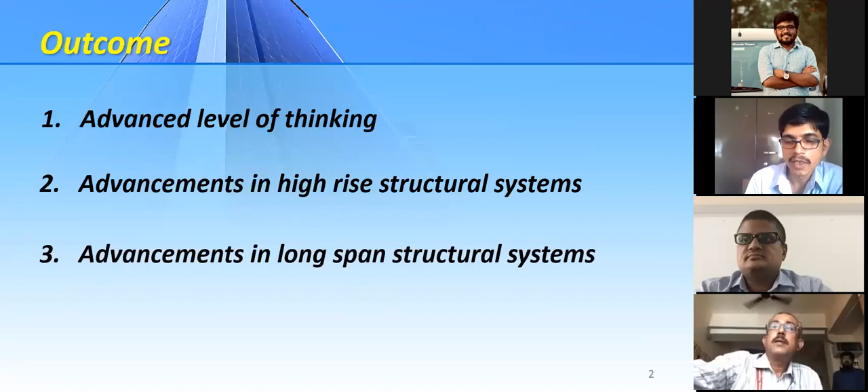So before we move on to the actual types of structural systems and their advancements, let us try to understand in a simple way what a structural system is. In the simplest way, we can define a structural system as one which transfers the loads through interconnected elements or members, right?

In your UG or PG studies, what you have done so far is analyze the individual structural element. But now, if you think of a structural system as a whole, you should be able to assess the interaction between those structural elements and how exactly they transfer the loads ultimately to the foundation without exceeding the stresses, under the various criteria that you already know, the deflection criteria or the stress criteria. So safely it has to transfer all the forces to the ground without exceeding the allowable stresses in the

members. For example, take this example. You can see this is a bridge. It may be a beam type or an arch type, or it may be a suspension or cable-stayed bridge, or a cantilever or truss type. Whatever the complexity of the structural system, ultimately its objective is to transfer the forces to the ground without exceeding the allowable stresses in all the members you are seeing now.

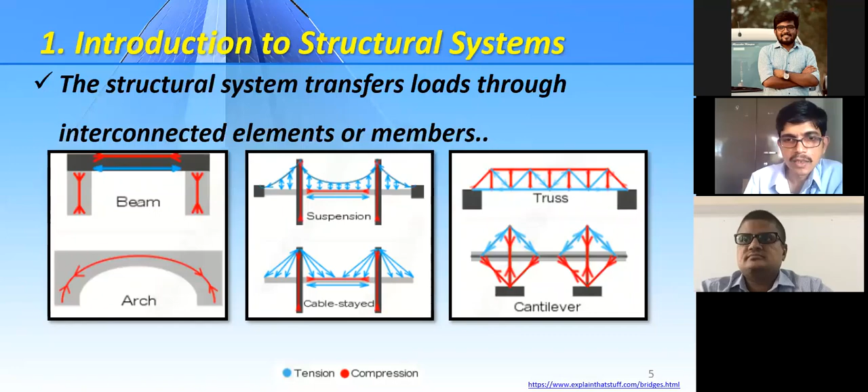In this picture, the blue marks indicate tension and the red marks indicate compression. We will see this in detail in the next one. It is not only in the case of bridges. If you take a simple frame structure, which you already know, it consists of a slab, and you can see this is the peripheral beam, and this is the column.

The main objective is that the entire load has to be distributed ultimately to the foundation. So as a whole, the structural system is a system in which there is an assemblage of all the structural members, and the entire thing behaves as a whole. And what is the objective? It has to transfer all the forces to the ground without exceeding the allowable stresses. That is what a structural system means.

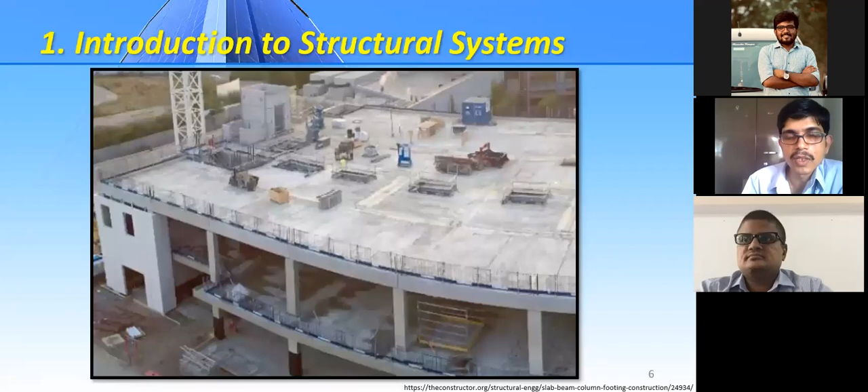So once we know what a structural system is, we should be able to understand the broad categories of structural systems. I'm going to introduce how you choose a structural system. For example, you want to build something. There are various requirements and various approaches to select a particular structural system. So what is the first approach?

The first and basic approach is the functional requirements. Then the structural material, the types of loads to be resisted and the load resisting mechanism. And one more: what type of forces your member is going to carry, in what way it is going to transfer the loads. That's what we are going to see. Taking the first one, we can categorize the structural system based on the functional requirement.

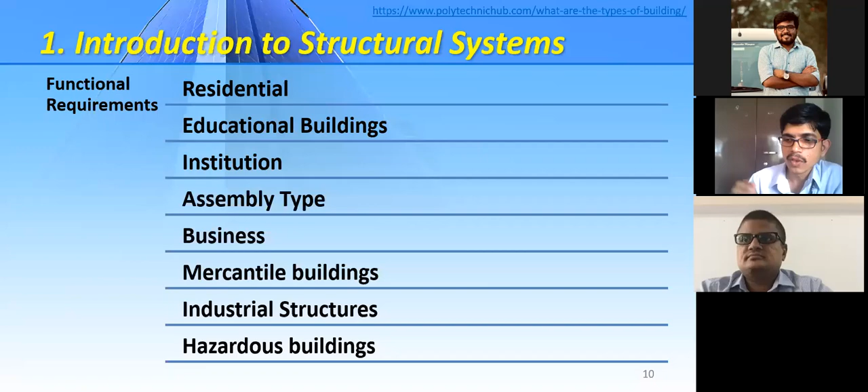Whether it is a residential building, an educational building, an institutional building, an assembly building or a business building, for any type of building you should first understand the functional requirement of that building. Because we can't adopt the same structural system for all these requirements, right? It's not possible. So first we should decide what type of structural system to implement for a particular function. That is one basic thing.

The next category you should decide is what type of material your structure is made of, because material is most important. To transfer all these stresses and forces, the strength of material is the most important criterion. The next thing is what type of structural system or material you are going to use in your structural system.

So what about the third one? The third one is what types of loads are to be resisted. This is most important, because if you take a normal residential building and you want to take only gravity load, your design will be different. But if you want to take lateral loads, earthquake loads, then the design is going to vary. So the third criterion is you should be able to decide the various forces acting on your structure. One is gravity, which is nothing but the dead loads.

Second one is whether you are going to consider lateral loads like earthquake and wind. Third one is dynamic, moving loads and vibrations. They are most important in case of bridges and machine foundations. And fourth one is fire. This is most critical. In case of public buildings, commercial complexes, shopping malls, some important buildings, fire is one of the most important criteria; you should be able to design your structure subjected to fire.

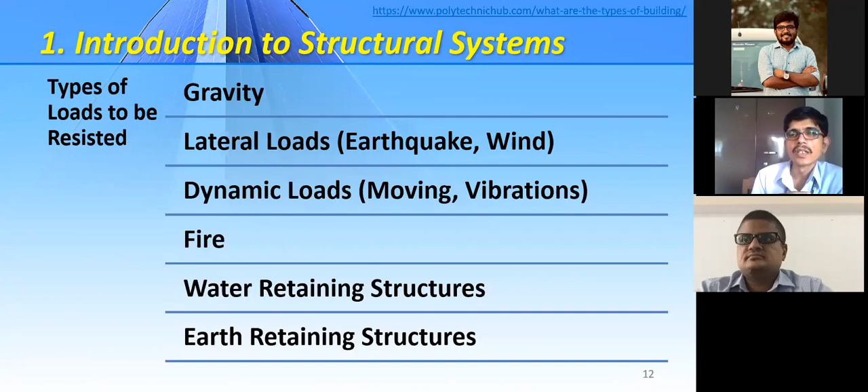Or whether that structure is a water retaining structure, or an earth retaining structure. So you should be able to assess the various forces acting on the structure. That is one. So what about the fourth one? The fourth one is load resisting mechanism. We are moving on to a very specific thing. Once you know the external loads, you should think of how exactly your structural system has to resist those external loads.

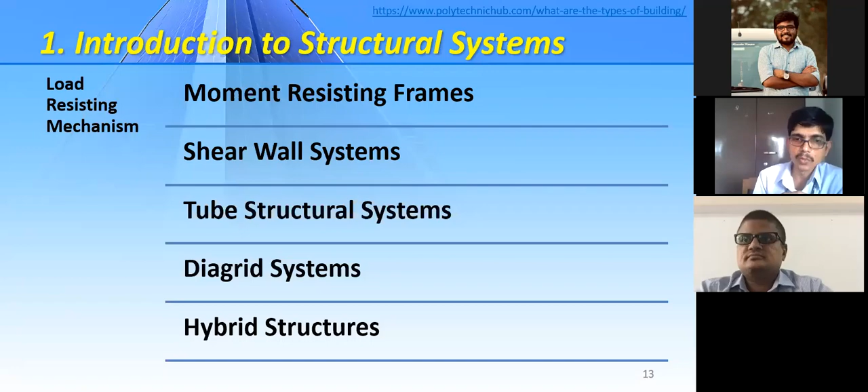Whether you can build a moment resisting frame, or adopt a shear wall system. If it is a very high rise, you should go to a tubular structural system. And based on the architectural view, if you want a diagrid structural system, you can adopt it. And some advanced structural systems like hybrid structure, which is a combination of, let us say, all the above. So that is one.

And last but not least is the type of primary stresses your individual structural member is subjected to. That is most important, because the most important aspect of categorizing the structural system is the type of primary stress that may arise in the members of the structure under the design load. For example, in your designs you have taken dead loads and live loads and multiplied them by a factor of safety, let us say 1.5. So 1.5 times dead load plus live load is nothing but your design load.

When your structure is subjected to the design load, what forces are going to develop in that structural member? Almost all the forces, whether gravity load or lateral load, ultimately, as we discussed in the beginning, have to go to the foundation. So how is your load going to travel from your superstructure to substructure: by tensile forces, compressive forces, a combination, or in the form of shear and bending? When all these stresses combine, the complexity arises. So this is a small introduction to the structural system.

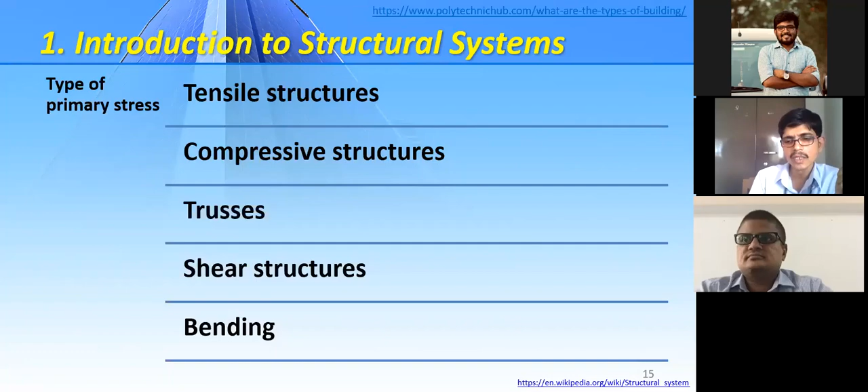Because in India, slowly we are moving on to the construction of high-rise structures. This is the present trend of developing advanced structural systems in order to build high-rise structures. If you take the past two decades, a lot of development is going on to achieve height and also span.

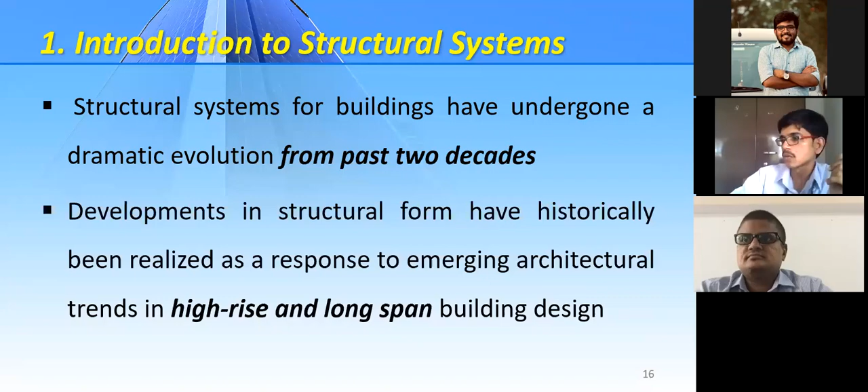So this is the second topic. I'm going to particularly choose the advancement of structures with respect to height. Before we move on to the latest or present trends of high-rise structures, let us pose one question to ourselves: are these tall buildings, or the achievement of height, a product of the modern industrialized world? Are we building high-rise structures only from the recent past, or from the past thousands of years? We should think about it.

Is it because of modernization or improvement of technology that we are able to achieve height? No, it is not so; look at some examples. These tall buildings are not the byproduct of modern civilization or modern industrialization, because it is an inherent human desire to build skyward, to go for tall structures.

The Mayan temples were built about 30 to 60 meters high. You know the Qutub Minar, around 73 meters. And everyone knows the Pyramid of Giza, about 139 meters high, built around 2580 BC, long back. So tall buildings are not a byproduct of the modern industrialized world, but in the past decades we are seeing so many developments due to technology. That's what we are going to understand today.

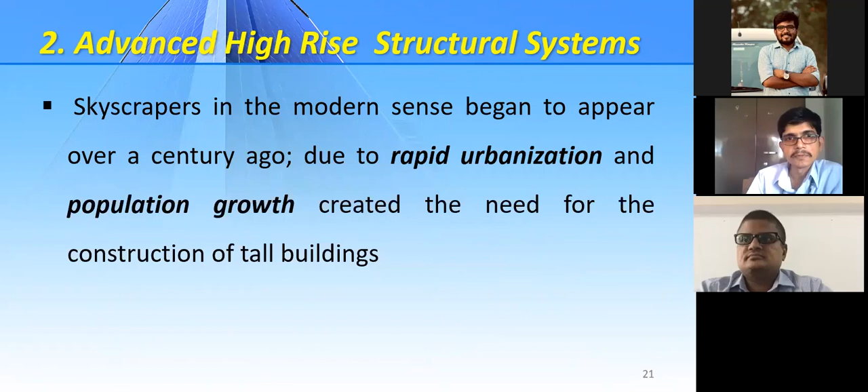As I told you, due to rapid urbanization and population growth, there is a requirement for tall buildings. Just for your information, I am sharing one of India's tallest buildings. Think of what type of structural system they would have adopted; you can explore later. The building is called The 42. It is a skyscraper in Kolkata, West Bengal, India. You can have a look at this.

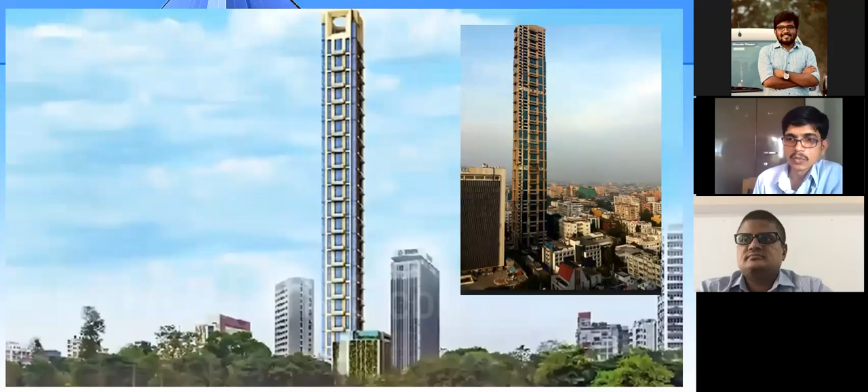This is a schematic picture, and this is the actual picture of The 42, India's tallest building. If you explore the tallest structures in India, one is in Kolkata, The 42, which is 268 meters high. Next is Mumbai, with many buildings. And in Bangalore, which is the tallest building? Have you ever thought of that? The tallest building in Bangalore is about 153 meters high.

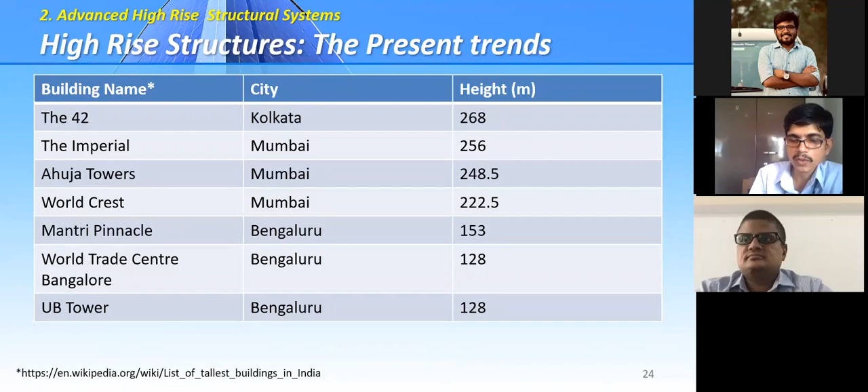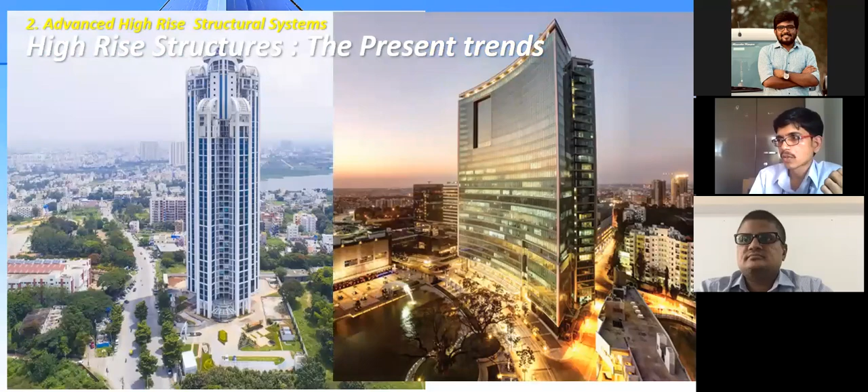Then the World Trade Center and UB Tower. This is Mantri Pinnacle, 153 meters high, the World Trade Center Bangalore, 128 meters, and UB City. The structural system for all these buildings is not the same. Why? Based on the functional requirement, the different load considerations, and also your money. If sufficient funds are available, you can adopt an advanced structural system, or it may be decided from an architectural point of view. There are many ways to decide the structural system.

Now we'll move on to the next one. Structural systems for tall structures can be categorized into two types: interior type and exterior type. What exactly does that mean? As we discussed in the beginning slides, it is whether your structural system is going to resist lateral forces or not, and if so, how it is going to resist them. Ultimately, all lateral forces have to go to the foundation. Then how will they go?

In the interior type, all the lateral forces on the structure are taken care of by structural elements located in the interior portion, at the center of your building plan. Those structures we call interior. If all the lateral forces are taken care of only by the periphery of your building, with all major structural elements at the periphery, then we call those structural systems the exterior type.

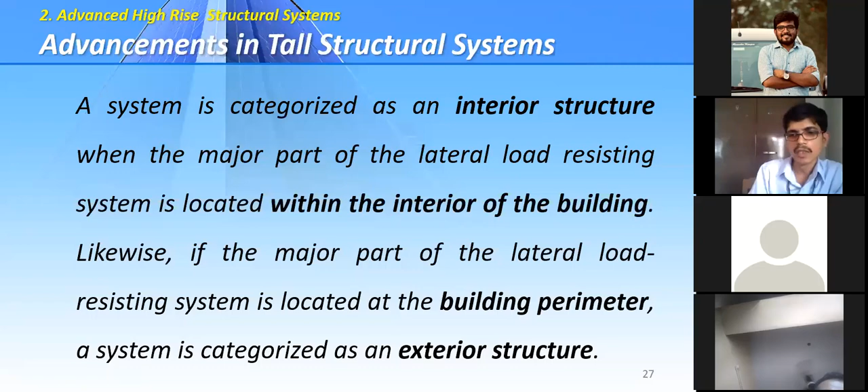Okay. So let us see this. There are so many things there; I'm not going in detail. I think the first one you already know. So what is this? This is a frame structure, right? So the first one you're seeing is a moment resisting frame. Everyone knows this. It is just a combination of beam, column, and slab.

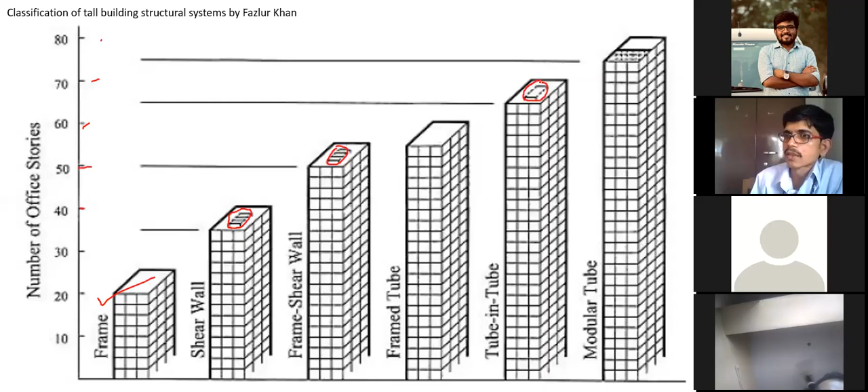But if you go higher and higher, like 40, 50, 60, 70, 80 stories, the structural system itself should be able to change. Once you observe this at the center, all these we will call the interior type. As I told, all the lateral forces will be taken care of by the structural elements located at the interior portion of the structure. Okay? And this is the exterior type.

I think many of you already know these terminologies like belt truss system, framed tube, truss tube. There are so many types of structural systems where the majority of your lateral loads will be taken care of by the peripheral columns and beams. Okay.

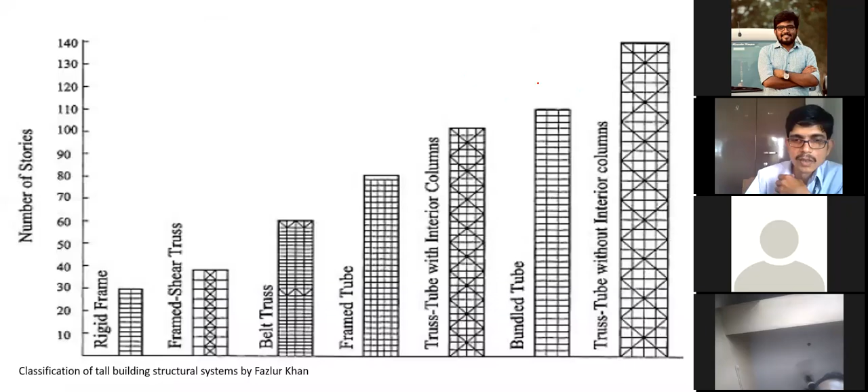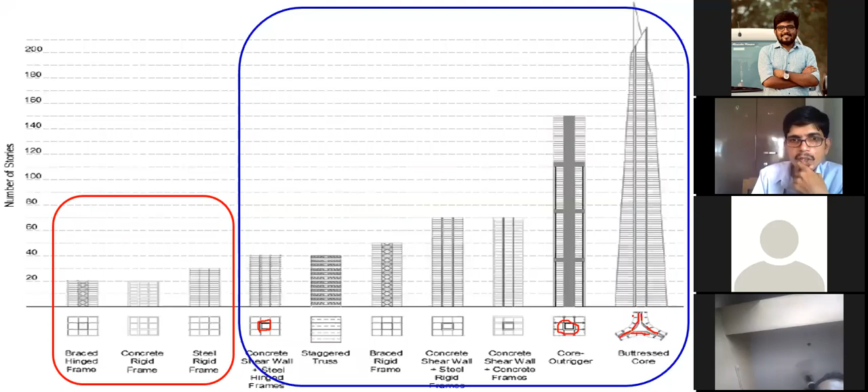So this concept is nothing but the shear wall system, where the entire lateral forces will be resisted by your shear wall. Okay, let us try to understand. The building you are seeing right now in front of you was built in 1903. It is not the first reinforced concrete; it is the first skyscraper in reinforced concrete, having only 16 stories.

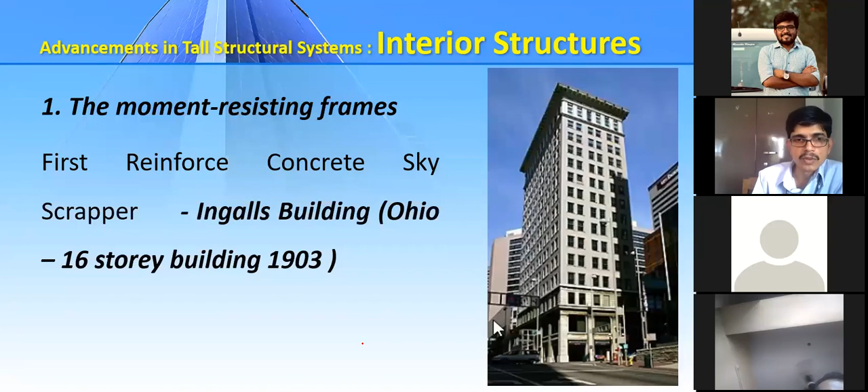You see the advancement. Now, what total number of stories can you expect? So 48. Now it is 800 or 900 meters high. You see the advancement of structural systems in the present scenario. Okay? That is one thing. And the next basic thing is the moment resisting frame.

So what is a moment resisting frame? A simple moment resisting frame consists of horizontal beams, or girders, and columns with a monolithic slab. So the next question is again the same: how will this moment resisting frame resist your loads, or how exactly is your load transferred to your foundation? In a moment resisting frame, the majority of the loads are transferred to the foundation through the resistance offered by flexural stiffness. The stiffness is the governing criteria, right?

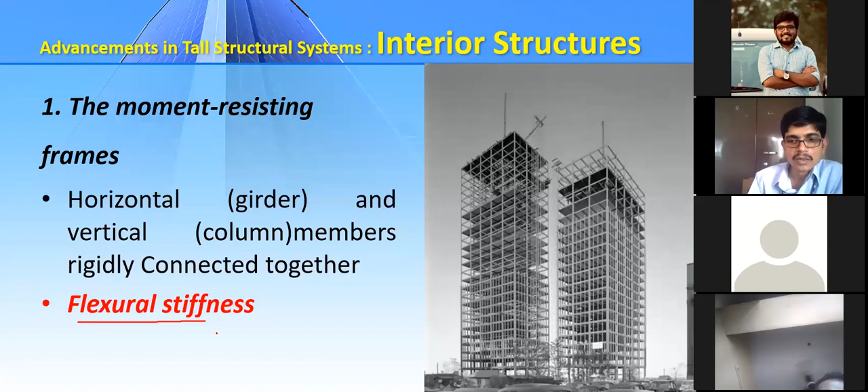Because when you designed the slab and beam, what was the governing criteria? You calculated the bending moment, no? The same way, if you take the structure as a whole, the flexural stiffness or bending action is mainly responsible for transferring all the loads to your substructure. Okay, so this is one more example, right?

So what is the second way? The second way all the loads are transferred to the substructure is through axial stiffness. I think you have designed columns, right? Everybody knows how to design a column. A column is strong in compression, right? But it will also take bending. But there are some special structural systems you can design in such a way that all the lateral forces are transferred only through axial stiffness. That we will see in the next slide.

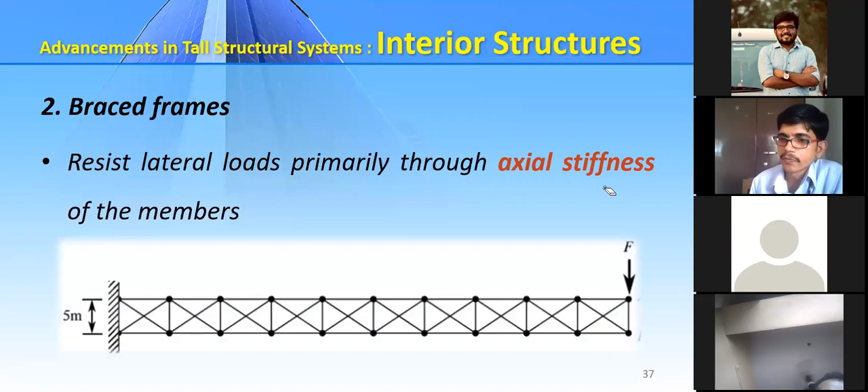So you see, just imagine all buildings. All buildings are nothing but a freestanding cantilever beam. Imagine all the buildings on the earth are nothing but a freestanding cantilever beam. If you take this F as a force, let us say a lateral load. Just take this F as a lateral load.

If you apply this, you just see, ultimately all the forces will go to the substructure by axial stiffness. That is the second way. So those we will call braced frames.

And further, if we move on to the next advancement in the structural system, it is nothing but the outrigger system. If you go taller and taller, we can't use the same structural system. For example, the basic structural system is the moment resisting frame. Can you use the same moment resisting frame if your building is 100 or 150 meters high? No, not possible.

You should be able to think in what way your entire structure will be stable, economical, and also aesthetically good. That is a challenge for structural design engineers. So if you go higher and higher, some additional structural systems we should implement into our building. Those are called outrigger systems. I think almost everyone knows the concept of the outrigger system.

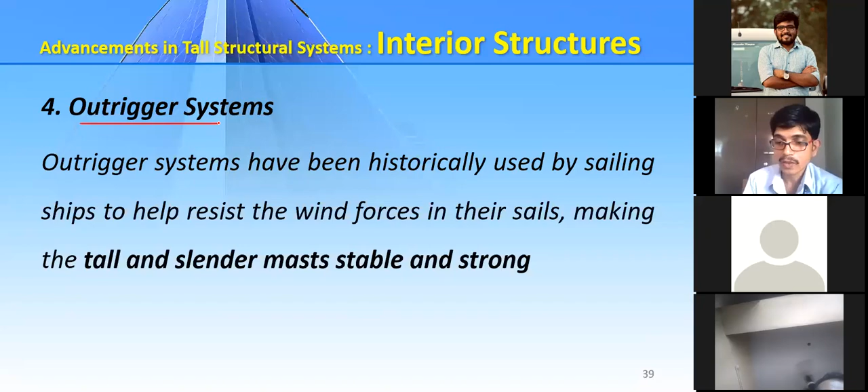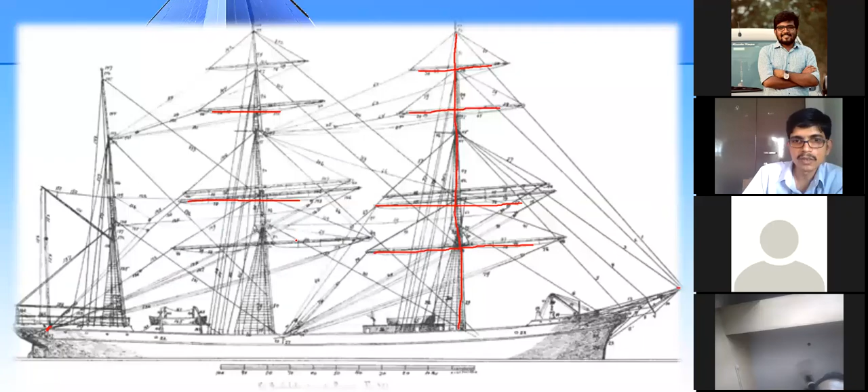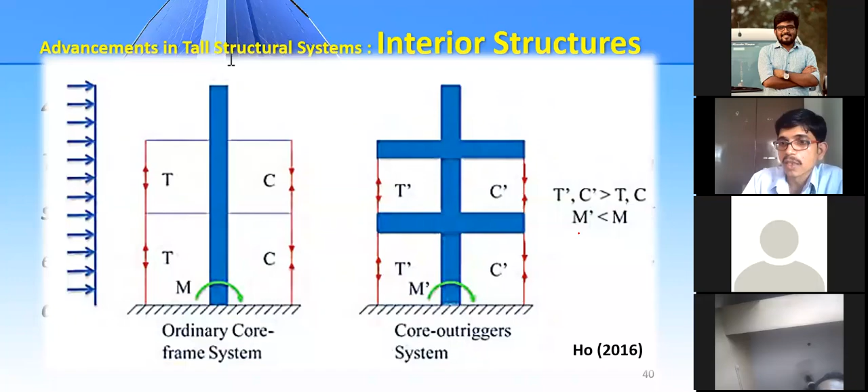But if your moment is more, it is very difficult to handle that moment with respect to design, detailing, and economy, if you give larger member sizes and more steel. But tension and compression you can easily handle, rather than this moment. That's the advantage of this structural system.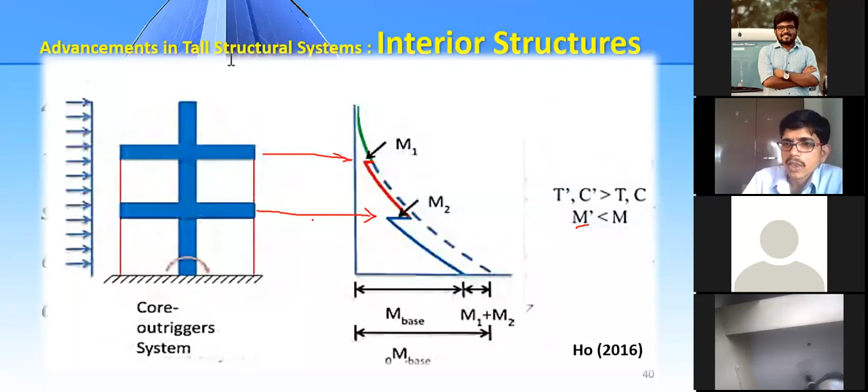So not only is the base moment going to reduce; wherever the outrigger is given, we can expect a reduction in the moment. You see, there is a reduction in the moment where you have given this outrigger. That is one. And this is one schematic representation.

This outrigger can be an RC outrigger or a steel outrigger. What you are seeing here, the red color portion, is this elevation. So this is what I was showing here. What we are discussing now is the interior type structure.

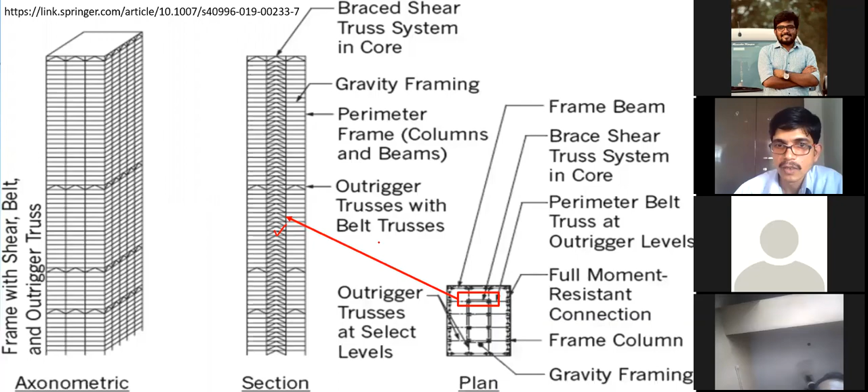So the second one, I'm just choosing the important points, not discussing everything. The second important structural component or subcomponent of any structure is the shear wall and frame interaction.

So just the same question: if you want to build a moment resisting frame for 50 floors using only columns, beams, and slab in one building, versus another building with columns, beams, slabs, and shear wall, which one is more effective?

If you don't provide the shear wall, what will happen? I think you know the design. Your compressive force, moments, everything will increase at the bottommost level, and you'd need to give very big size columns, 1 meter by 1 meter, maybe even 2 meter by 2 meter. Nobody will agree to that, right?

So in order to achieve economy of the entire structure, and to reduce the structural member sizes, you should use this shear wall in interaction with your normal moment resisting frame. This is one of the structural concepts you should understand.

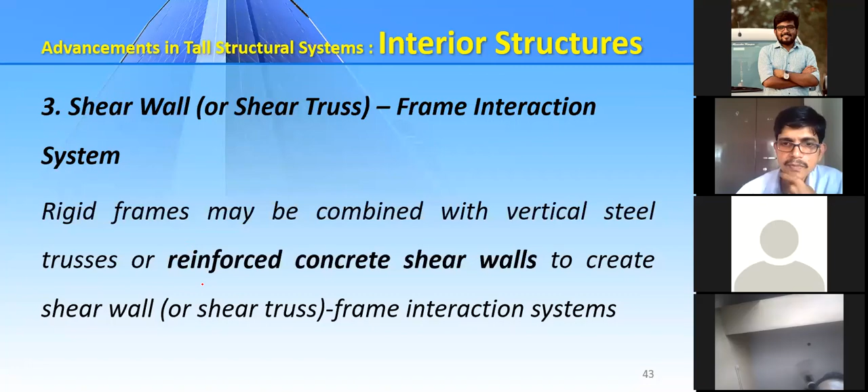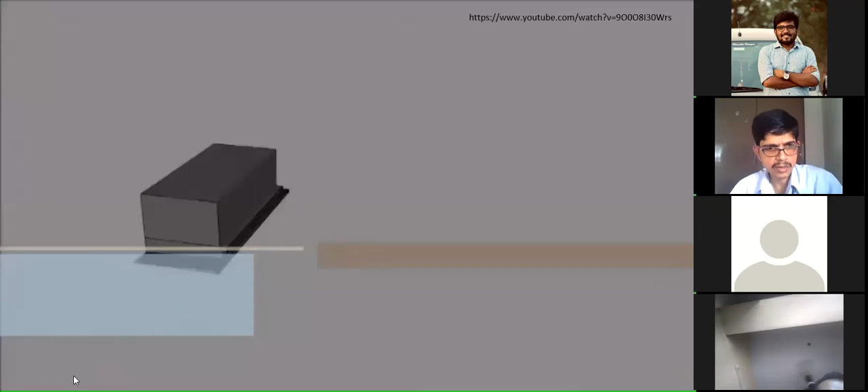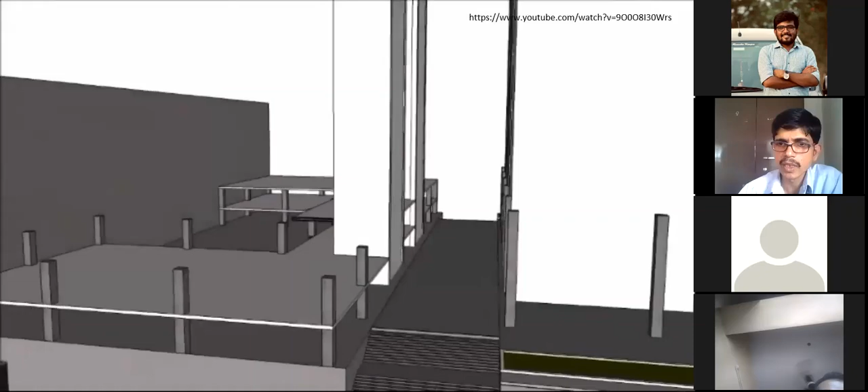I'll show a 2 minute video so you can understand the same building. What you are seeing in this animation is the same building or plan you saw. These are the core, or shear wall core, and these are the frames - columns and flat slab. There will be interaction between this core wall and your frame in order to resist the lateral force particularly.

So that is one thing. What you are seeing now here are the columns of a flat slab, and what you see like a box - those are nothing but concrete core wall.

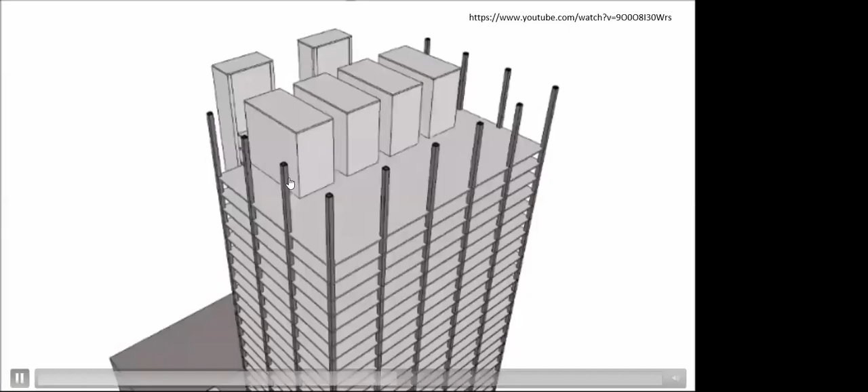So next, ultimately, after these - I shared starting from a moment resisting frame, then outrigger system, and the next one is this frame and shear wall interaction. And the latest, if you take this example, I think everyone knows this - the tallest reinforced concrete structure is the Burj Khalifa.

So everybody knows this, but what type of structure system is it? Can you guess what type of structure system? It is a reinforced concrete structure, but particularly what type of structure system has been adopted, because it is the world's tallest reinforced concrete building. You can't easily choose the type of structure system based on small criteria - you should be able to think of all the scenarios. So this is basically a reinforced concrete structure.

Okay, just see the video. A small video is there. After this video, you just answer yourself or think what type of structure system has been adopted.

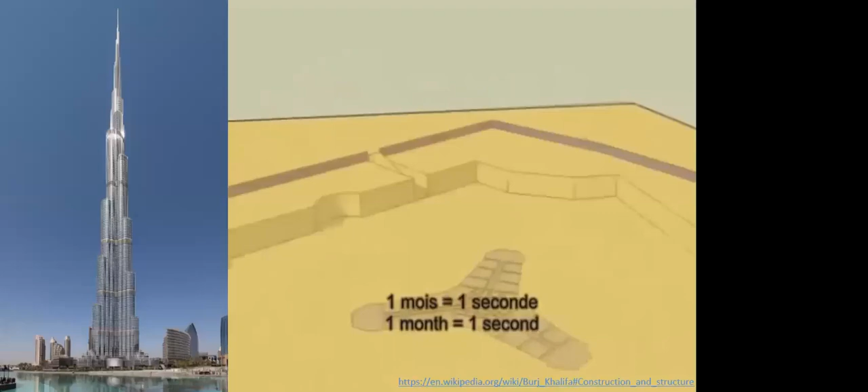As I told you, it is impossible to construct this world's tallest building, almost a kilometer high, by using this beam column system, moment resisting frame. It is impossible. Just think of what type of structure system may have been adopted - it will come right in front of your eyes. Just see what it is actually.

You can just think of it - it's basically reinforced concrete material. You see, they have chosen the material as reinforced concrete. Then they should choose what type of structure system to adopt.

So many concepts are involved here in the design - aerodynamic designs, dynamic analysis. So many things are involved in order to construct this building, the skyscraper, let us say.

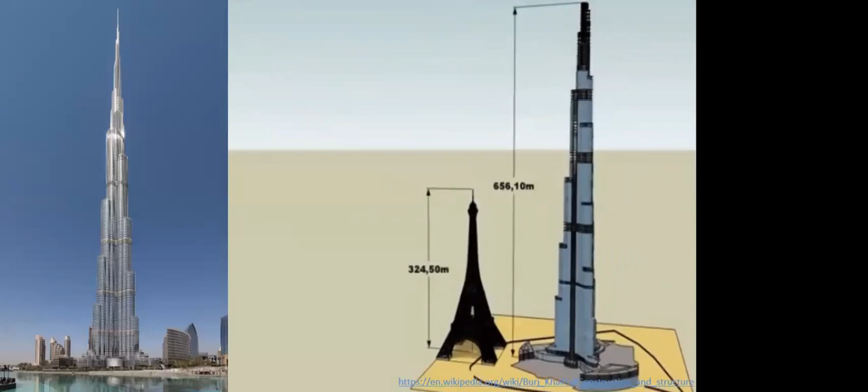Total 828 meters high it is. So just if you compare the height of this Eiffel Tower with this Burj Khalifa, you can appreciate what advancement has already happened in the real scenario, and what technology they are adopting in order to build these type of structure systems. It's almost double - exactly it is almost double the height of your Eiffel Tower, and it is reinforced concrete.

So that's the end of this session one. I've split this technical talk into two or three sessions - let us say introduction part, and this is the second part. So we have discussed starting from the Great Pyramid of Giza, which is built around 2000 BC, and we have seen what is the advancement that has happened in order to build the world's tallest reinforced concrete structure.

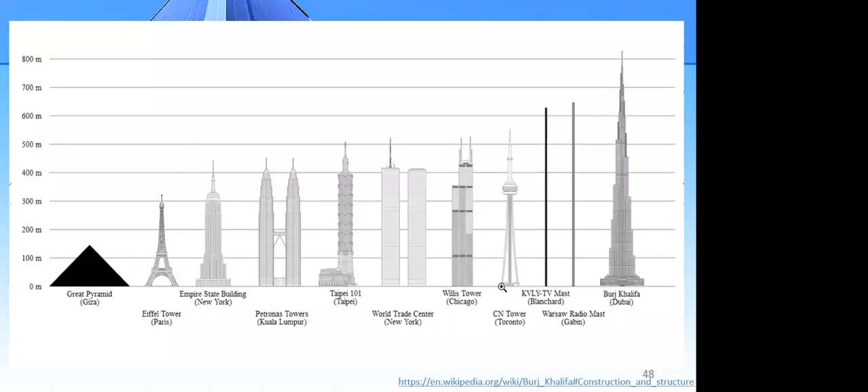So what type of structure system it is? If you think of that video again, the structure system they adopted is nothing but the shear wall. What exactly you saw, that is just core wall - it is nothing but a core wall. So those core walls are nothing but the shear wall. And external steel - they are going to cover it with external steel.

So the next advancement in the high-rise structure system is the diagonal structure system. This time still in session 2, still in high-rise structures.

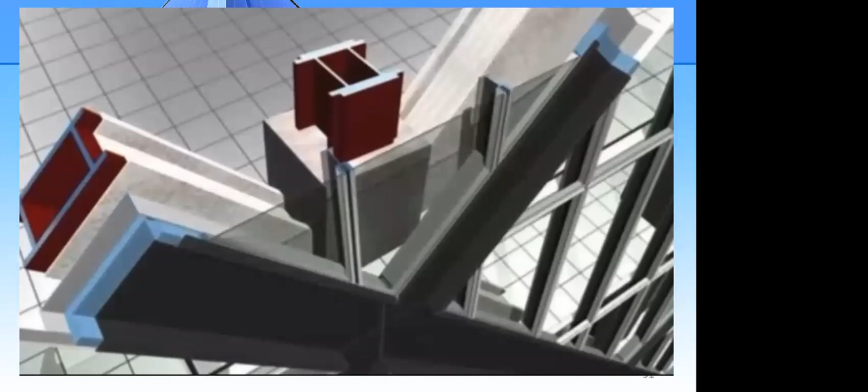Just observe - so this is why I've chosen this diagonal structure system. We have discussed the lateral load transfer mechanism is through axial stiffness. First one is through flexural stiffness, and the second one is through axial stiffness. The best example is the diagonal structural system.

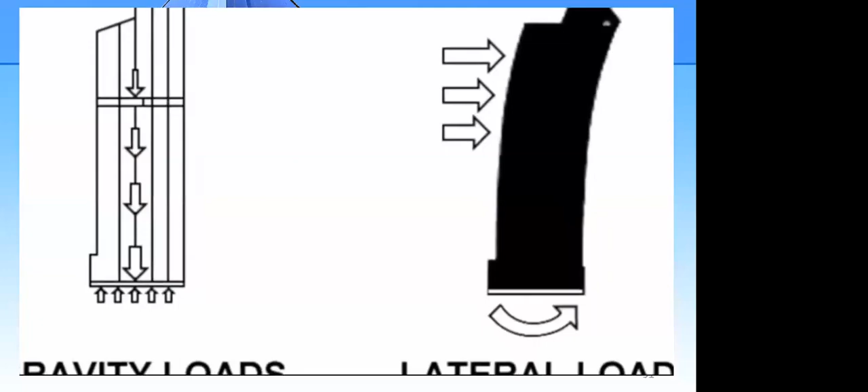Just observe - we can't use any other structural system in order to achieve the architecture behind this. We can span for greater length, eliminate large columns. Can anybody see or seeing the columns here? No. We can achieve large spaces without any column.

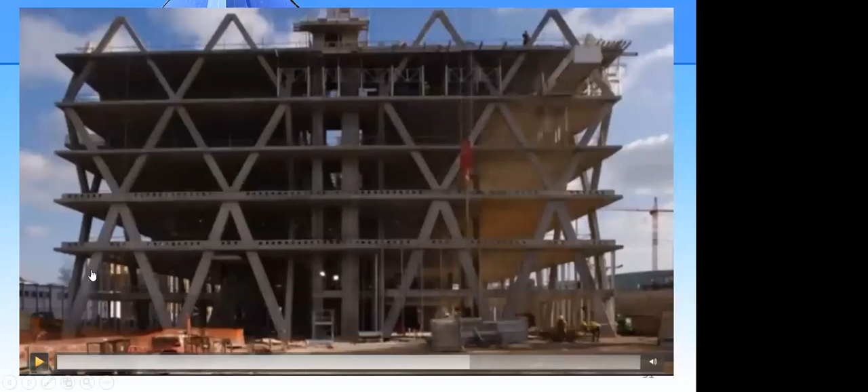I've stopped this video to just observe what difference they are observing. You already know so many buildings where beams and columns are there - there's a moment resisting frame. But what is the difference between the moment resisting frame and this diagonal system? The major difference is the moment resisting frame transfers your lateral force particularly in the form of flexural stiffness - bending of slabs, bending of beams, and development of moments in the column, which we already discussed. But here, if you see, there are no columns which are vertical. What you are seeing here, those columns are - what exactly I'm pointing out - these columns are inclined. That is the main difference between a normal frame structure and this diagonal structure.

Those columns are steel, okay, so these are inclined in nature. So whatever forces come on this, it's going to transfer through axial stiffness - like tension or compression. So we can achieve the architectural view also. You see all peripheral structure, the framework, having inclined columns. We can save the money also.

And also one most important concept you should understand here - if you adopt this structural system, in future, it may be like any blast load, or any impact, or collision of any aircraft. In some way, if any damage happens, we can expect only localized failure - we can't expect complete collapse of the structure. That is one of the most important criteria in this diagonal structure. You can avoid the progressive collapse due to external explosion. So that is one thing.

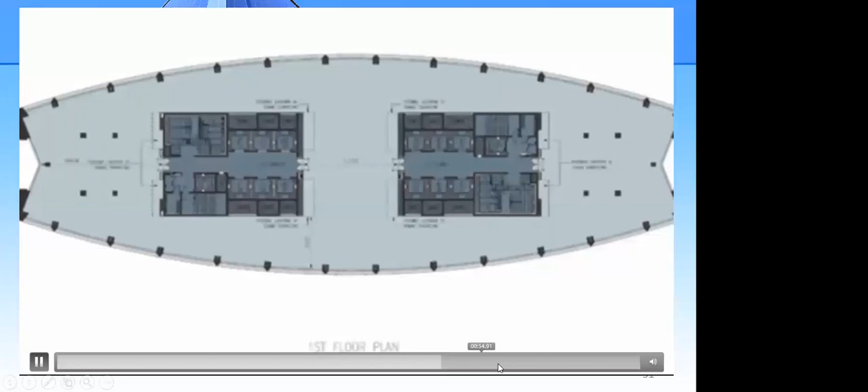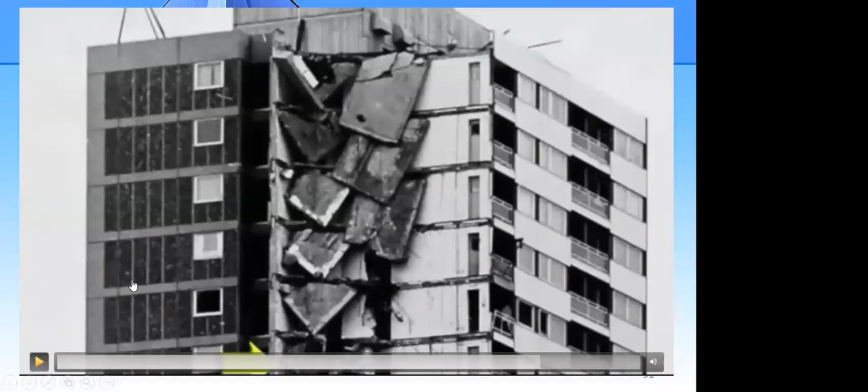So this will come under the category of exterior structure, because all your forces will be taken care of - in case of a normal frame structure, we can expect progressive collapse. But if you adopt this particular type of diagonal structure system, the effect of damage is localized here, so we can prevent the collapse of the entire structure.

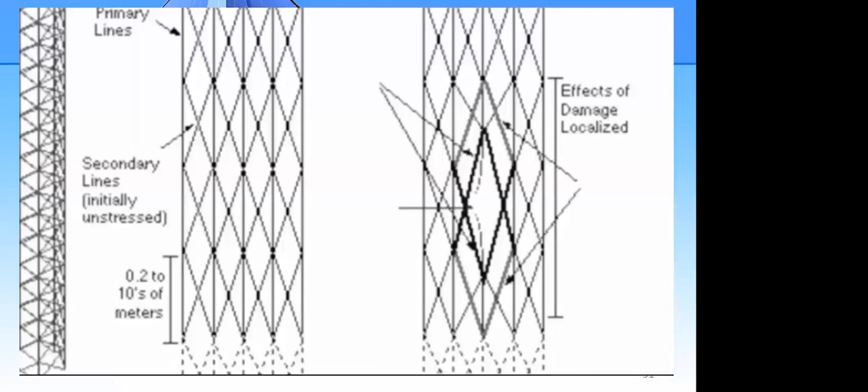So that is one. So we'll just take some case study. One case study I want to share is iLabs building in Hyderabad.

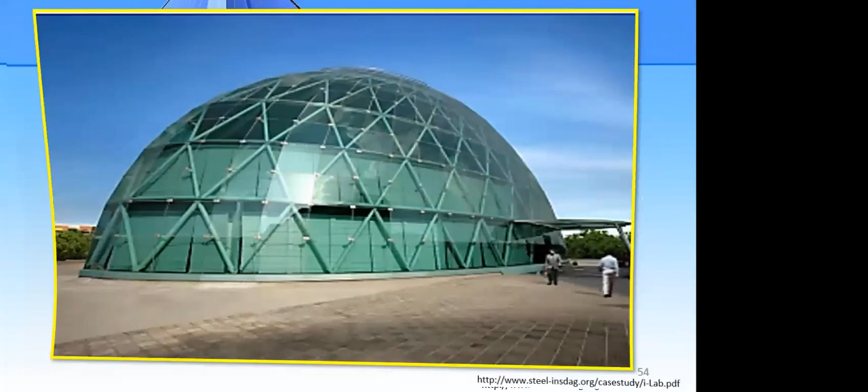So this is a diagonal (diagrid) structure system which is there in Hyderabad. What type of structure is it? It is the exterior type structure.

So if you see, the total length of the building, the longer dimension, is about 55 meters, and the width is 23 meters, and the total height is 21 meters. And this structure we are going to use effectively. We can able to utilize the light, and it is a barrier-free, usable office floor.

You see, so these are nothing but first floor, second floor, third floor, fourth floor. So a 4-story building. You see, this is one more picture. 1, 2, 3, 4, 5 - so this is a 5-story building.

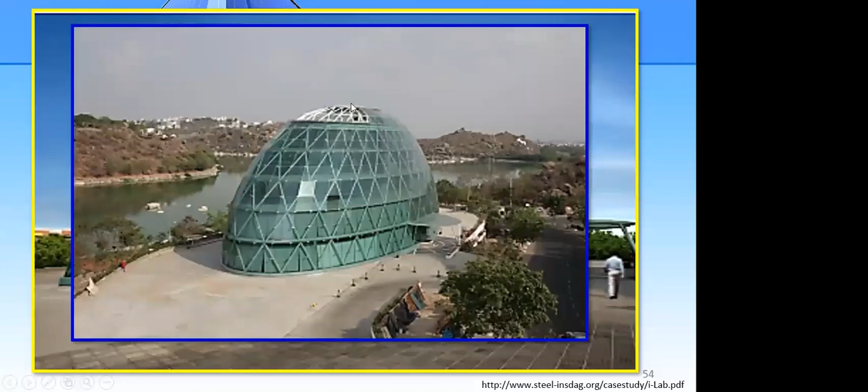I just observe the topmost, what you are seeing in white color. So the next picture, what you are seeing is inside - this is the inside picture of that particular lab.

You see, so this is the topmost floor, where you can see the column free space. So is anybody seeing a column inside this? No. That's the advantage of using this structural system.

It is going to satisfy your architectural requirements, it is going to attract the people, and it is also giving importance to that particular city. Whatever you are seeing here are nothing but your peripheral columns which are inclined in nature, on the column-free space, and the next picture if you see.

This is the top floor. So what exactly you are seeing is the top floor. They have made it as a garden. It is a wonderful view.

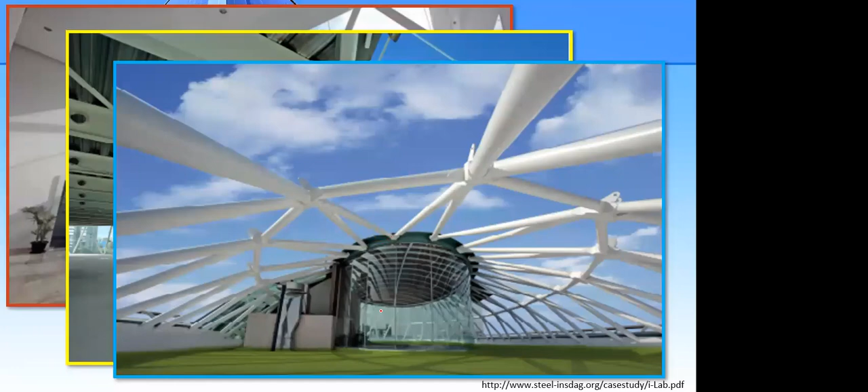And one more thing, what you are exactly seeing here is one small detailing. I think you have studied steel structures, and you have studied so many connections - moment connection, pin connection, so many things. You should be able to map all these here.

So if you see this, we will call it a node. What exactly are you seeing? This we will call a node basically. So what is happening here? Always you should be able to think of the basic question. As a civil engineer, you should keep one question in your mind.

How exactly the loads - whether it may be gravity load or lateral load - are going to transfer effectively and efficiently to the substructure. So can you just think of how exactly the force is transferring here?

You already know - beam, column in your building or institute - I think all institutes will be normal frame structures. You saw so many columns, beams, slabs inside your classroom. Slab is there, beam is there, and then column is there. That everyone knows. But here, what is happening?

So this is basically a steel structure. What you are seeing here is a network of hollow MS sections. It is a network, not one member - it is a network of hollow steel section with nodes.

That's what this junction is - we call it nodes. So these are welded - you see all these hollow MS sections are welded at this junction, welded to this plate.

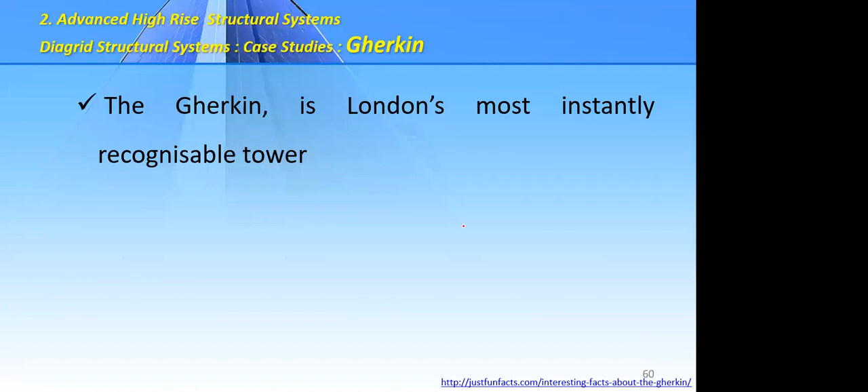So that is one thing, and the second diagrid structure system - what I just selected for you is the Gherkin, London's most instantly recognizable tower. Can you just have a look at this? I think everybody knows this - one or the other way, everyone has seen this picture. So this is a wonderful example of a diagrid structure system due to its aesthetics and all.

This tower is particularly aerodynamically designed to reduce the wind load on the structure. You can easily see it can able to resist the wind load if you compare it with other buildings. So this particular diagrid structure system is designed aerodynamically.

And the building is a steel frame - you see this is a steel frame and a glass facade with the diamond shape. You see the advancement of the structure system. So this is one more view of the entrance.

You see, that's the diagrid structure system. What you should be able to observe here: your columns are inclined. These are inclined columns, and they are going to resist compression and tension only. And you are seeing these junctions. These junctions are nothing but your floors. Those floors you can't do in RC; it is a composite deck slab.

So that is the end of session 2, or part 2 of this talk. And for the last part of this technical talk, I selected long span. Up to here, we have encountered the various structural systems we can adopt in order to achieve height.

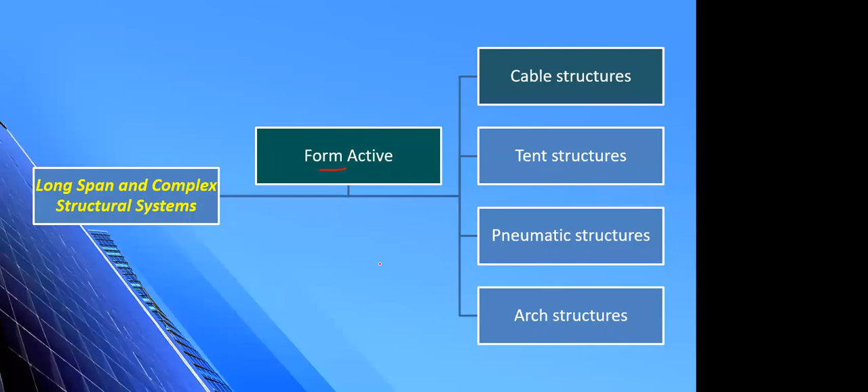Today we are going to discuss only the form active structure system, and then end the session. The form active structure system we can categorize as cable structure, tent structure, pneumatic structure, and arch structure. Just for your information, I'm going to take a typical example where you can appreciate the particular type of structure system.

What are we going to discuss now? Form active. The name itself gives some clue. The majority of the loads will be taken care of by the form. Form means shape. What shape is your structure? Whether it is a parabolic shape, or a hyperbola, or it may be a dome. But these special types of structure systems can't be implemented everywhere, as we will see.

As the name itself indicates, form active structures are those in which the loads are taken by the form, or the shape of the structure. One more interesting concept is that the form active structure system redirects external forces by simple normal stress. This is one of the peculiar actions of this structure system: only arch action, by compression or by tension.

Just keep in mind the form active structure system takes care of your external forces through normal stress. It may be compressive or tensile. That's all. There will be no moments, no torsion, nothing. We will see the real application in our society. The bearing mechanism of the form active structure system is essentially in the material form, as we discussed.

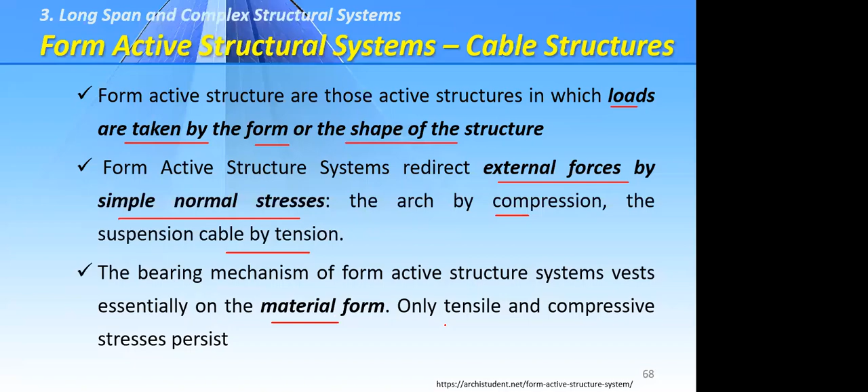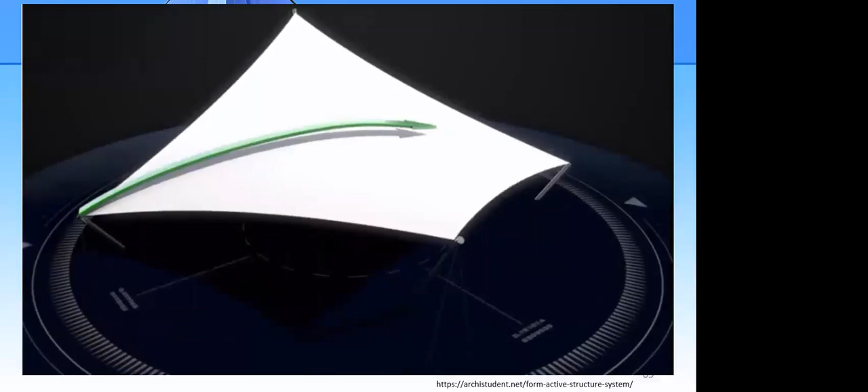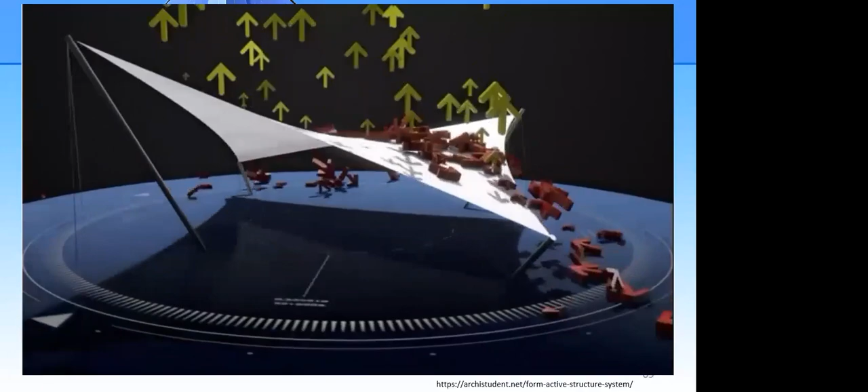So this hyperbolic paraboloid or elliptical paraboloid. These shapes are simpler to analyze and also reconstruct. That is one of the advantages. You see, this is a double parabola, where the external load may be snow, because nobody can walk on that. Only snow loads can be there, or the suction force due to wind. All those will be taken care of by your members.

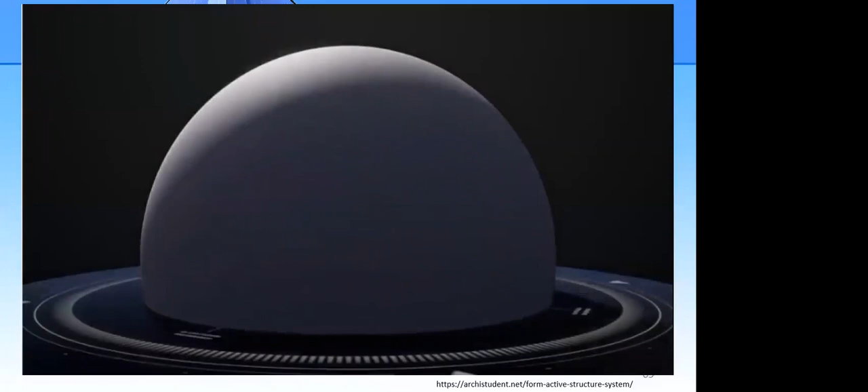Here, those are the cables or posts which are subjected to compression and tension force. The last one is inflatable. This is very interesting. We are going to discuss the structural behavior. This basically works on internal pressure. Purposefully, an internal pressure or air pressure will be created from the inside by some advanced mechanism, so that tensile stresses develop in that membrane. That we will see now.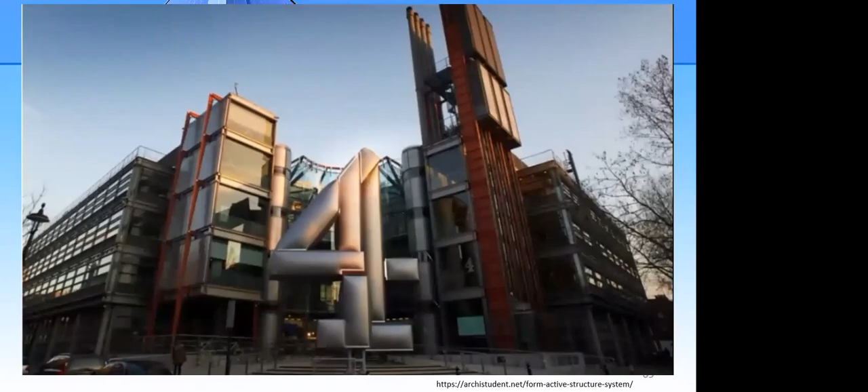In order to do this, we need a great support. The support conditions are most important, and you should have a strong anchor with the tension on the foundation. In normal cases, tension will not come into the foundation. In a normal RC structure, your foundation is subjected to compressive force only. But in this case, the pre-stressing force and reaction try to pull the entire unit. So proper anchoring should be there, and your foundation should be analyzed and designed for tension force.

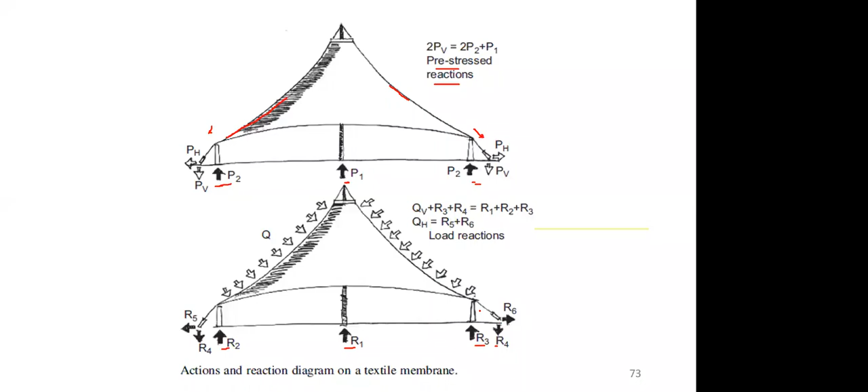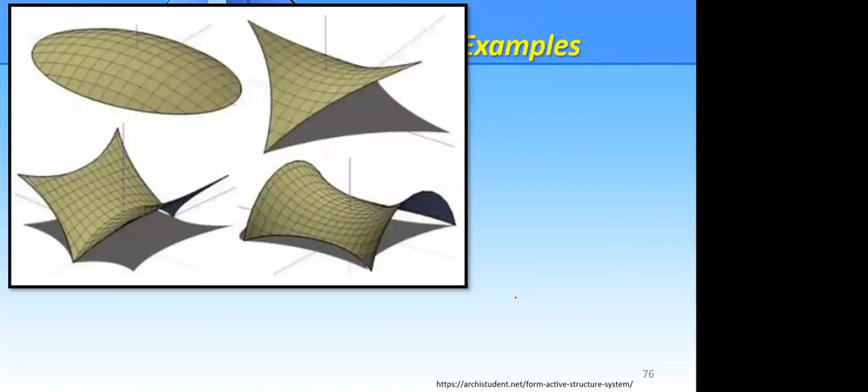Ultimately, what is your structure? You take sigma M equals 0, sigma V equals 0, sigma H equals 0. That's all about civil engineering. Ultimately, the structure should not move; it should be in equilibrium. That you should be able to satisfy. That is one thing I wanted to discuss in a little detail. You can see some examples of this form-active structure system.

One example I took here is the Georgia Dome stadium in Atlanta. Just see the dimensions. The dome has an 83-meter height. The structure length is 227 meters, and the width is 185 meters. The stadium was the largest cable-supported dome in the world. You see the advancement of the structural system. Those are permanent structures.

This is the largest cable-supported dome in the world, where we can use these concepts. This is the picture you are looking at right now, the inside picture. Everything is taken care of by tension and compression. There will be no movements. That is the specialty of this structural system.

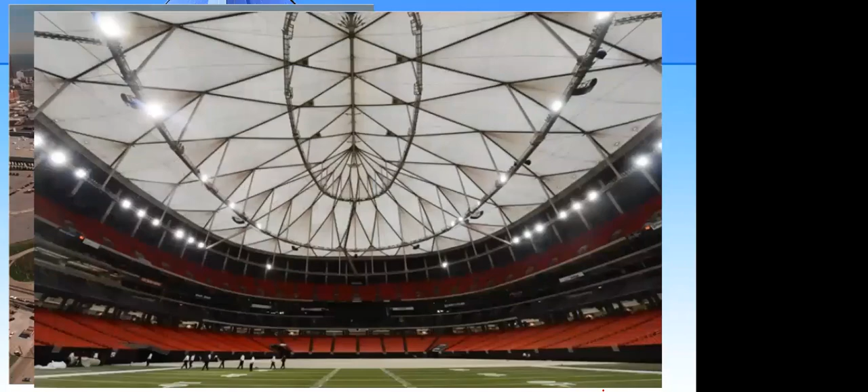So that is something. But you see, these types of structure systems, we may not always expect to build the largest and tallest. So there are so many applications in our real-life scenarios. I think now we are able to recall. So many things you already saw in Bangalore, or in any other place. Sometimes it may be implemented in toll gates and all. You see, all these are nothing but tensile structures, particularly form-active tensile structures, right?

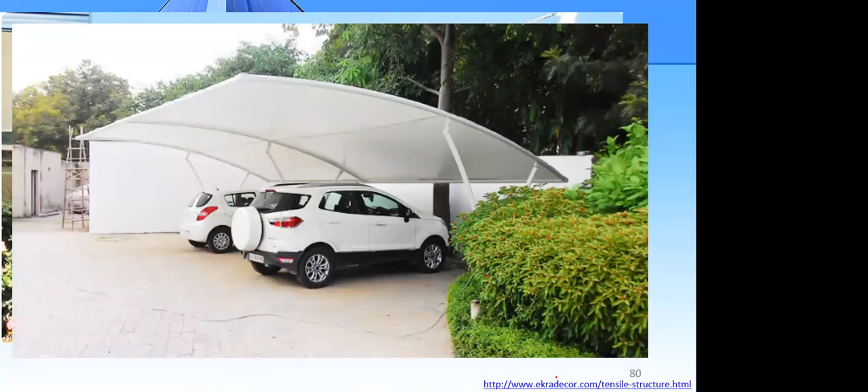So what are the various applications of this tensile structure? You can use it for some restaurants or for a sunshade like this. For car parking, you can use this concept of tensile structure, and you can use it for auditoriums. So basically, we call it a tensile structure itself. Everything will be under tension here. And we can use it for walkway covering.

I think you saw. You can just remember now. I think you can see so many in our state itself. And one I saw inside the Infosys campus, for the canteen and all, they have used this type of tensile structure, right? So covering for restaurants and for swimming pools. Yeah, so many applications are there. That's all about the cable structure.

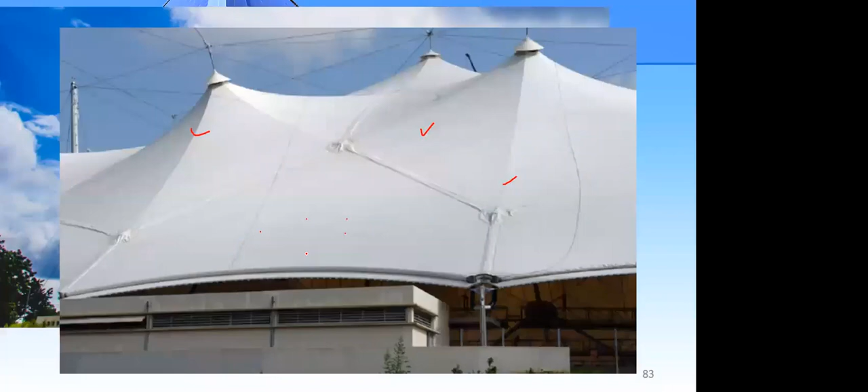I will just show the second. This is the tent structure. This is nothing but a tent structure. You see, these are nothing but the supporting posts where they support these cables or tents at the apex. This is the closer picture. The same thing. So it is a multi-purpose national sports stadium located in Nigeria. What we are seeing here is a multi-purpose stadium located in Nigeria.

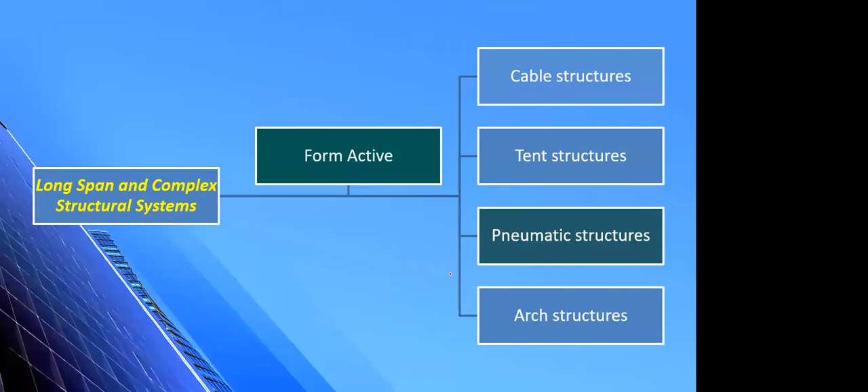And the last one is the pneumatic structure. This is a very important and very interesting concept. So what is happening here? In the pneumatic structure, you are going to create the internal pressure before you apply the load. Particularly, these pneumatic structures are implemented where there is snowfall. It is able to withstand the wind load and snow load also.

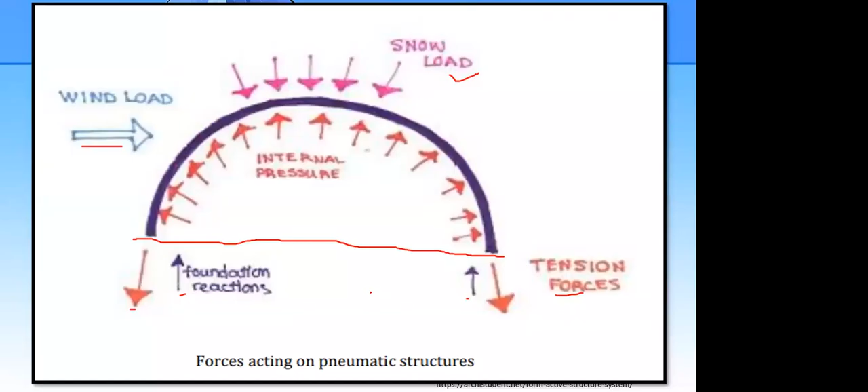So this is the tension force and foundation reaction, the basic forces it is able to transfer to the foundation. So this is one picture. What you are seeing is a pneumatically pre-tensioned construction. They consist of a layer that is subjected to tensile stress, which encloses a volume of air, just like a balloon.

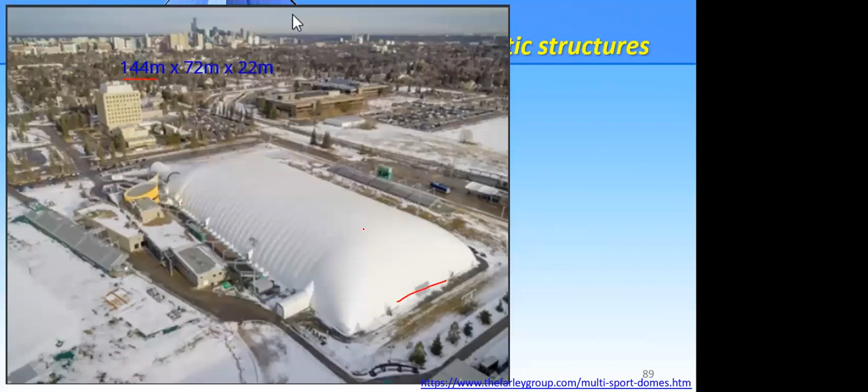So the next thing: what you are seeing here is a pneumatic structure system. The length is 144 meters, its width is 72 meters, and its height is 22 meters. This is the auditorium inside. Oh, sorry, it is a ground which we can use for sports activities.

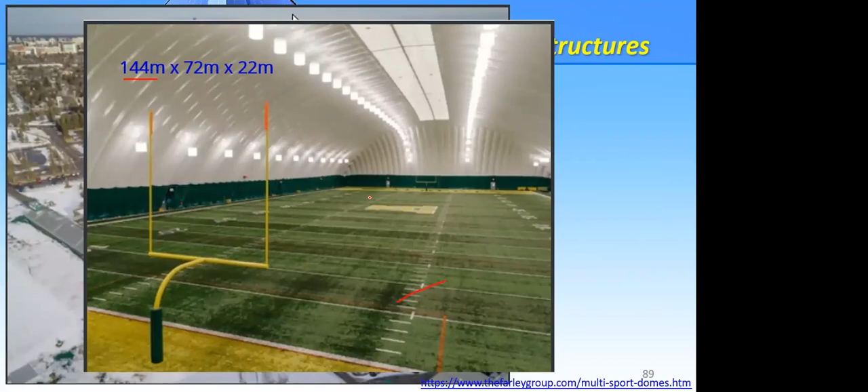So finally, I want to say these pneumatic structure systems are systems that rely on the pressure of air as the primary support, right? Because if you see this picture, if there is no air inside, there is no structure. The primary support is the inside air pressure. That is the most important thing you should understand. And it may be a single membrane or a double membrane. It may be a spherical shape. There is flexibility; there is no hard and fast rule that it should be the same shape as this.

So finally, I can say that the use of this pneumatic structure is more common. In all cases, it's the functional requirement, which we discussed during the first slides: on what basis you select the structure system. If you use it for military purposes, all military structures should be safe, stable, portable, and economical. In that case, we can go for these types of pneumatic structures; analysis-wise and implementation-wise it will be simpler.

So you see, they are easily movable. And the application is not limited; you can use them for medical stations, tents, and bulk storage, and they are capable of withstanding hurricane winds and loads of snow. That is the main thing.

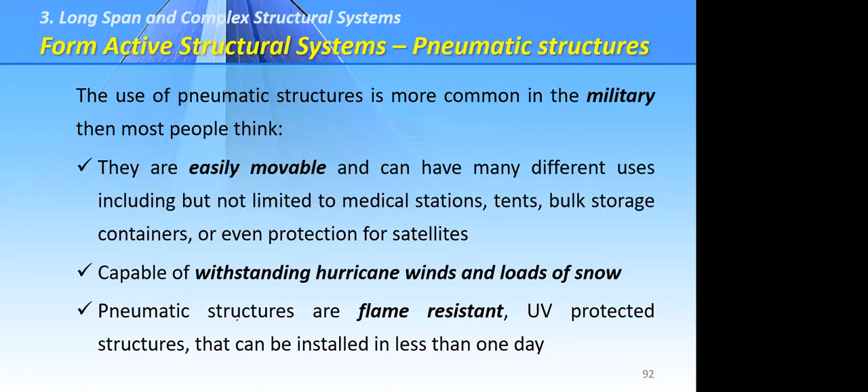And pneumatic structures are flame resistant. You see, that is most important. If it is military, fire is an important criterion. It should not burn easily. You see, it should be flame resistant and UV protected structures. You see, it can be easily installed in one day. It depends upon the situation. So that is one thing.

So with this, I'm going to end this technical talk. But this is not the complete end of this session. I call this series 1, okay. So if opportunity is there, I can continue and share my thoughts with respect to this advanced structural system. Okay.